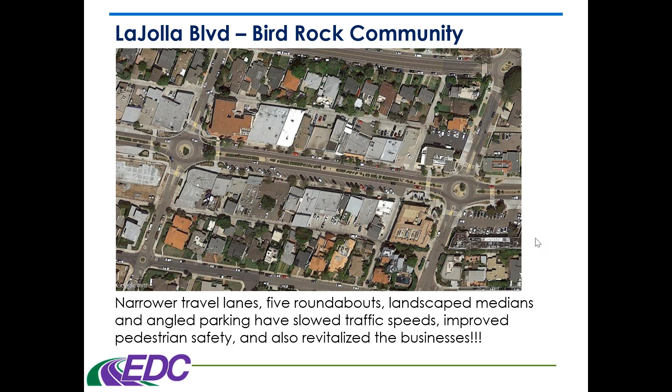That really wrapped up the unsignalized improvements that are part of the STEP initiative. Before we get into the signalized topic, the leading pedestrian interval, let's take a look at this guide.

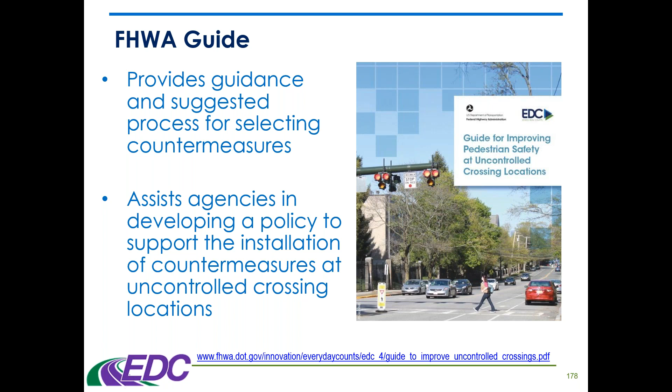One thing I wanted to go over in this book that was important was the countermeasure selection process - it's a 6-step process, and I wanted to quickly highlight these 6 steps. We're going to follow the processes suggested in this guide because it offers countermeasure options based on road conditions, crash causes, and pedestrian safety issues.

So the first step is called collect data and engage the public. The bullet points that fall under step 1 are: collecting pedestrian crash and safety data, evaluating pedestrian accommodation policies that your agency has, initiating a pedestrian safety action plan, reviewing pedestrian and traffic safety plans, and conducting a walkability audit.

You're going to need to do a careful review of your agency's existing plans and policies to help prepare for more in-depth data analysis and public involvement. I want to say there is another guide I want everyone to be aware of - it's from FHWA, released in 2017, called How to Develop a Pedestrian and Bicycle Safety Action Plan.

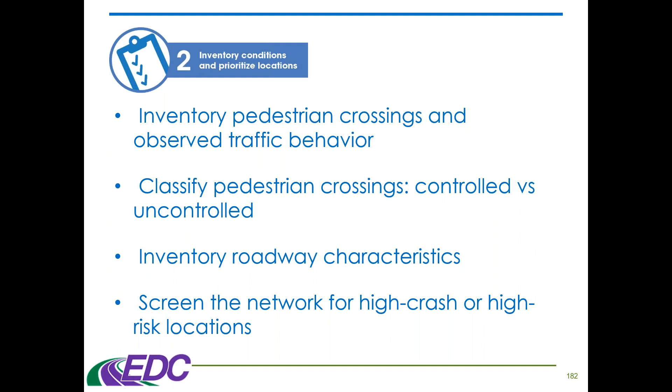We have some things at ODOT that are helpful for those last two. We have our TIMS software that helps to inventory roadway characteristics, and we also have our GCAT. I think Caitlin today might talk a little bit about GCAT.

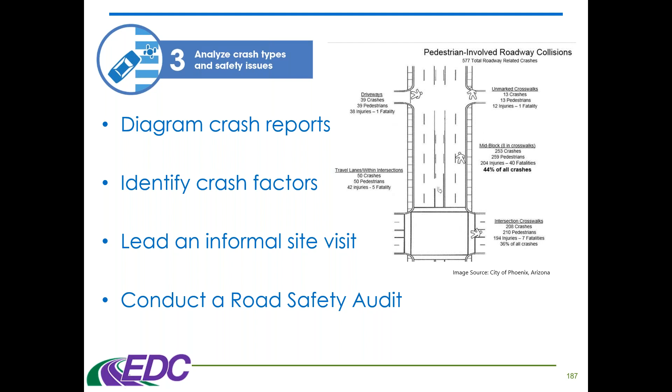Much like in my FoRRRwD webinar starting on Thursday, we take a look at identifying similar roadway characteristics, like curves on two-lane rural roads, and have special treatment for those curves. It's the same with the STEP program. You can deploy crosswalk safety treatments across your entire agency, especially if they're low-cost treatments, and get a lot of bang for your buck with the systemic approach instead of only attacking the hot spots the data shows.

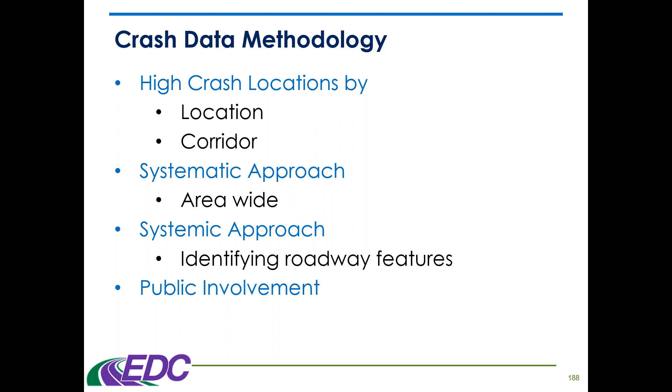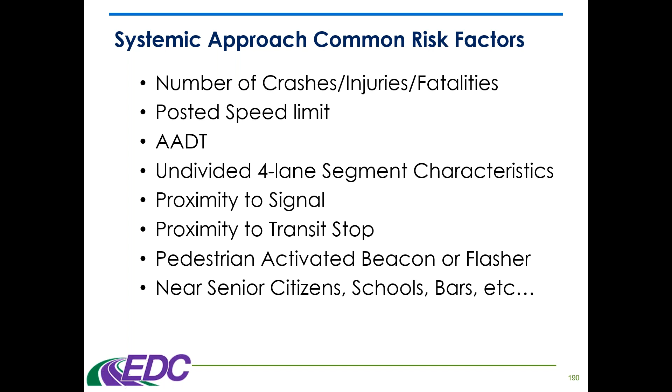In the MUTCD, there are 9 different parts, but Part 2 is all about signs, which includes warning signs for pedestrian crossings. Part 3 is all about pavement markings, including crosswalk pavement markings. And Part 4 is all about traffic signals, including of course the pedestrian crossing aspect of traffic signals.

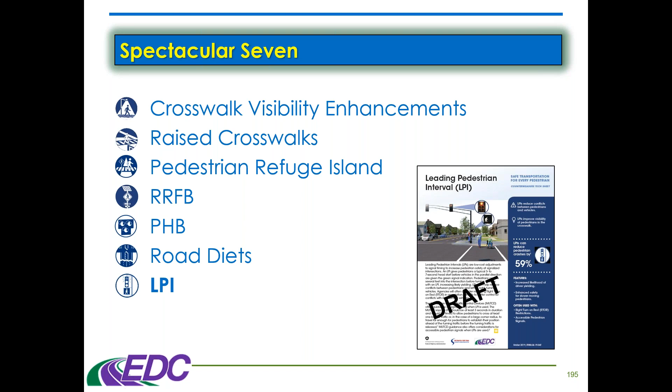As you can see in this slide, you need a 3-second minimum advanced start for the pedestrian to begin walking across the crosswalk. That's the minimum; you can have anywhere from 3 to 7 seconds before the vehicles get the green light to go in the same direction.

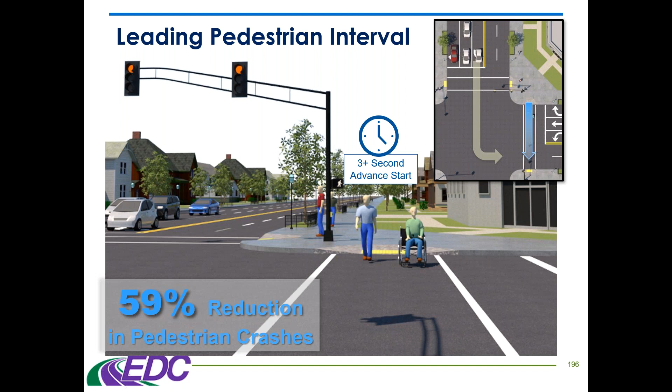This is very helpful for older and disabled pedestrians who are slower to start crossings. Let me turn up the volume so you can hear this video of the LPI in action. The beginning shows what the problem is before installation, then you see how it helps the pedestrian toward the end. This is down in Huntsville, Alabama. It even shows how signal technicians can alter the signal system rather easily if they already have certain types of signals, showing a technician adjusting the timing to install the extra seconds for the leading pedestrian interval. Let's check this out.

In the northeast corner of Alabama lies Huntsville, the Star of Alabama, also called the Rocket City, where the U.S. Space and Rocket Center stands tall as a reminder of courage, progress, and success.

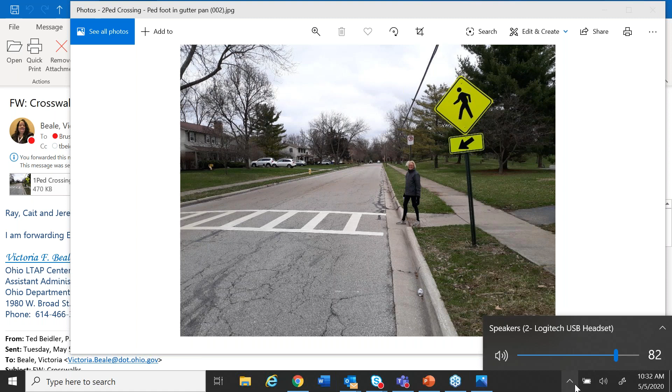All right, so let's go back to this. We were actually hearing it pretty good, Ray. Oh, you were? Yeah, I was anyway. I'm sure, hopefully the others were too. I won't turn it up all the way then. Okay, here we go.

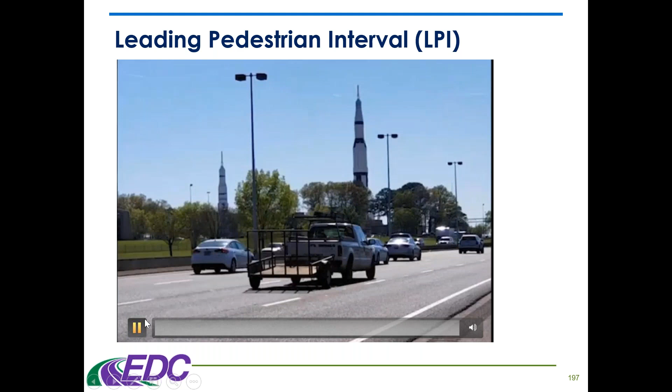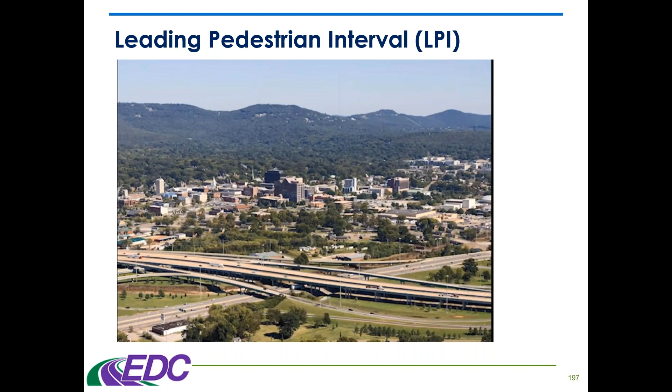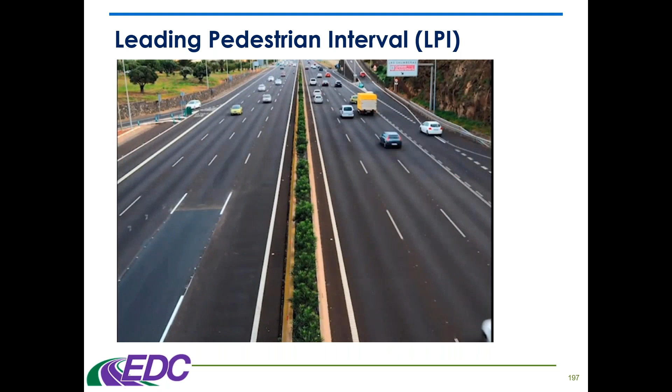In the northeast corner of Alabama lies Huntsville, the Star of Alabama, also called the Rocket City, where the U.S. Space and Rocket Center stands tall as a reminder of courage, progress, and success. In a progressive and expanding city such as Huntsville, the transportation system must be vibrant, safe, and accessible. With Huntsville's dedication to safe travel for all users, it comes as no surprise that the city is focused on improving pedestrian safety. The city uses the leading pedestrian interval, or LPI, to provide an additional level of safety for people walking. The LPI provides an offset or a head start for pedestrians when crossing the street at an intersection before vehicles turn. LPI is low cost, easy to implement, and requires no additional equipment. Better yet, the leading pedestrian interval has been shown to reduce conflicts with pedestrians by as much as 60%.

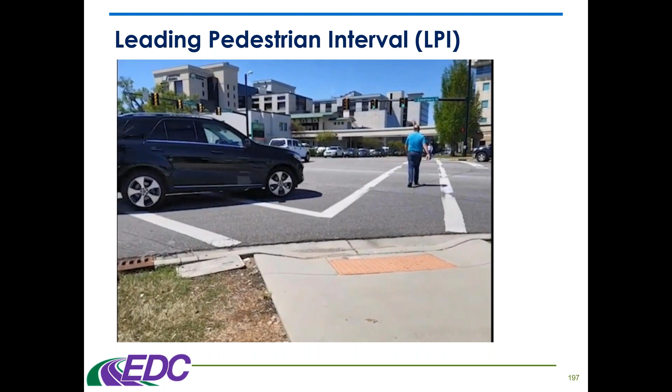At the intersection of Governor's Drive and Madison Street, pedestrians typically have conflicts when starting to cross the roadway at the same time as the vehicle receives a green light. This frequent conflict can be significantly reduced by implementation of the LPI.

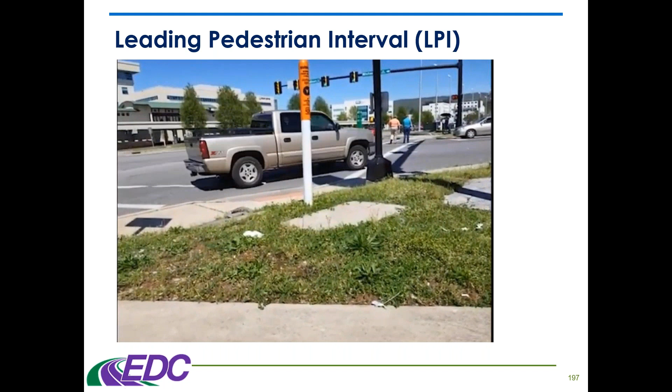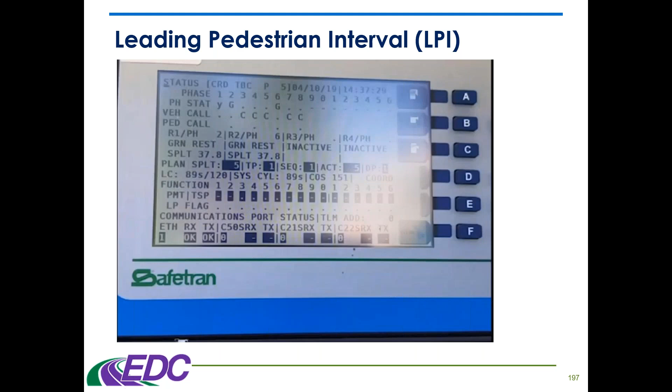The LPI is implemented by changing the settings in the traffic signal controller equipment. Inside the cabinet at Governor's and Madison is a 270 TS2 Type 1 controller. Any TS2 Type 1 or 2 will work. To start, select Controller, then select Timing Plan.

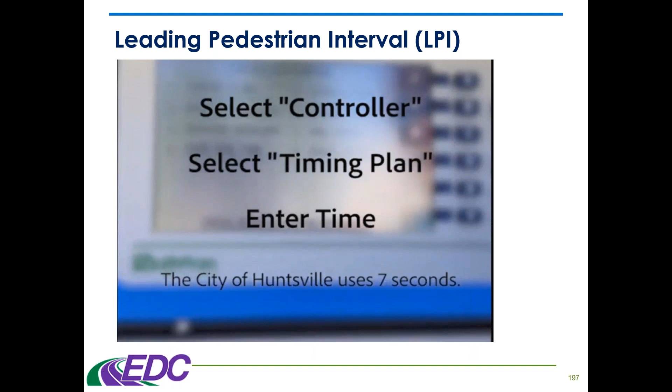The manufacturer's name for the LPI in this controller is Delay Green. Select the time in seconds for each phase where you will employ the LPI. The city of Huntsville uses 7 seconds. That's it, and you're done.

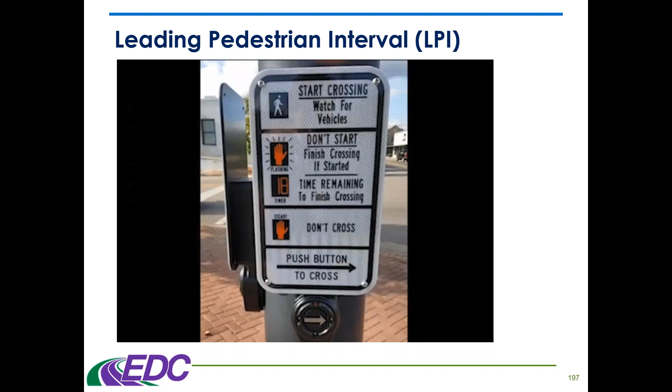Pedestrians should always activate the pedestrian push button. Now that the LPI is active, the walk signal appears 7 seconds before the vehicles get a green light. This puts the pedestrian safely in the crosswalk and in the view of the waiting motorists.

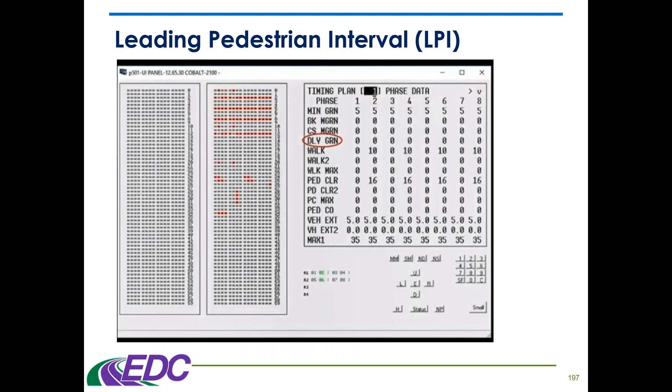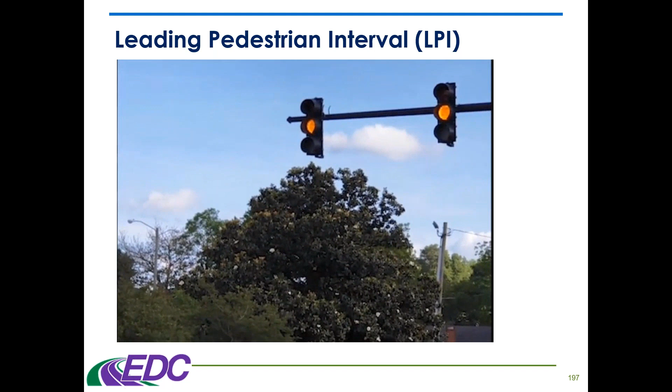Negative impacts to vehicle delay can easily be mitigated with activating controller coordination, phase data, or pedestrian settings. A lagging interval will provide an extended green time for motorists and clear the pedestrian crosswalk. Left-turning motorists are focused on the signal head and oncoming traffic and not on pedestrians in the crosswalk. A no right turn on red may also be used for added protection.

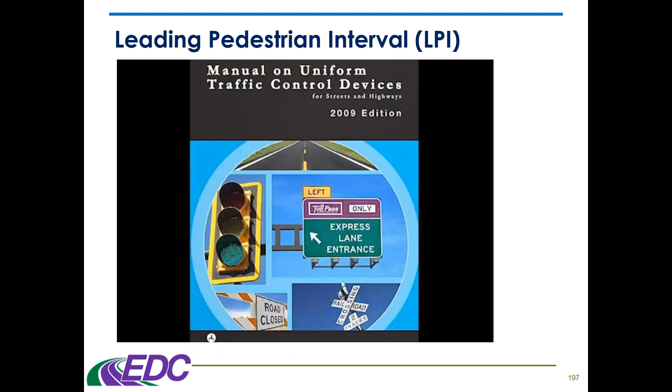The Manual on Uniform Traffic Control Devices addresses the LPI in section 4E06. The city of Huntsville has nearly 350 signalized intersections, of which 12 have the LPI. Based on results thus far, they plan to do more at select locations.

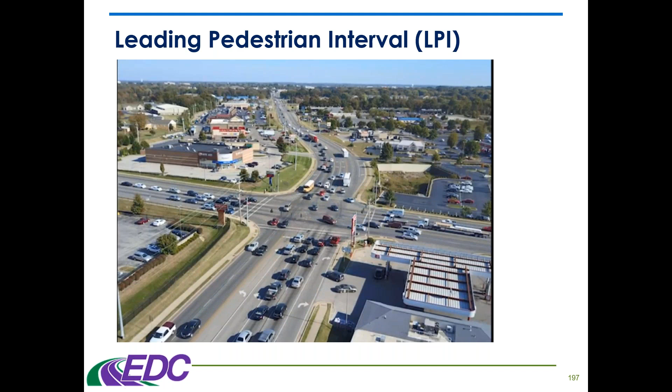No surprise that the Star of Alabama's choice of using the LPI demonstrates that the City of Huntsville is committed to pedestrian safety. If you'd like further information on the LPI and its implementation or pedestrian safety, contact the FHWA Office of Safety or visit their website at safety.fhwa.dot.gov.

So Ray, I have an additional comment for you from Canton. It says: okay, multiple funding sources and project types. Some have been part of larger federal aid projects. Others have been part of local resurfacing projects. We have an overarching complete streets strategy that we implement where possible.

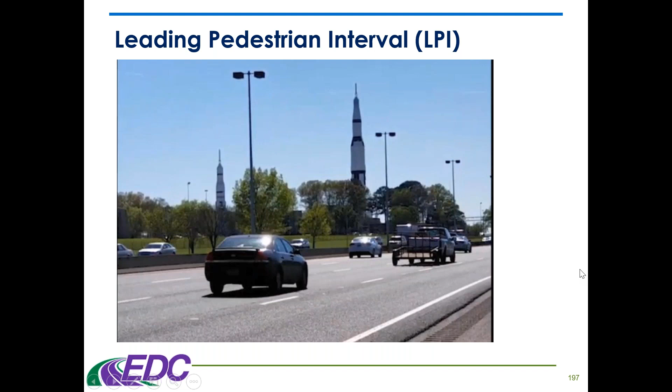All right. Very good, City of Canton. We give them an A for the day, don't we, Victoria? Absolutely. Okay, so

They gave you some sources so you can find more information on the leading pedestrian interval, but one was where to find it in the MUTCD, in section 4. Remember, part 4 is all about traffic signals.

4E.06, paragraph 19 to 23. It says if a leading pedestrian interval is used, it should be at least 3 seconds in duration and should be timed to allow pedestrians to cross at least one lane of traffic, or in the case of a large corner radius, to travel far enough for pedestrians to establish their position ahead of the turning traffic before the turning traffic is released.

I think the video did a good job of showing the problem there, where you had the car and the pedestrians starting out at the same time, and then the pedestrian jumped a little bit, and then the car had to put on the brakes. So this hopefully eliminates that problem.

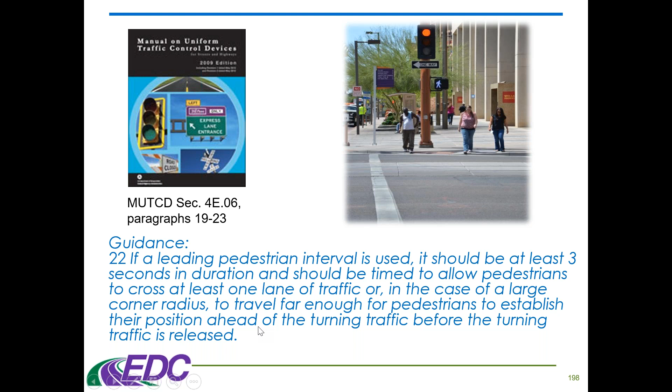And then they also showed you a specific kind of signal controller in the video. So there are some implementation considerations depending on the hardware you have and things like that.

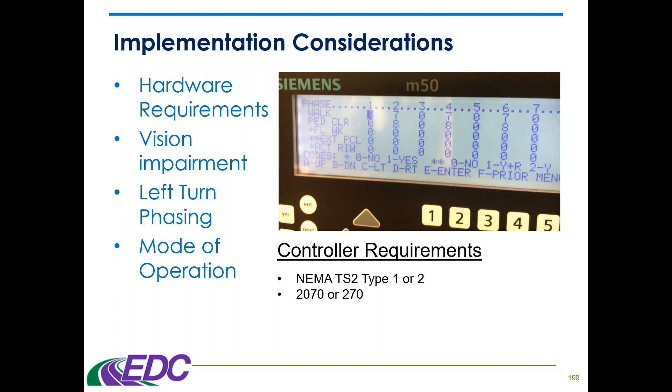They sure as heck made it look easy in the video, though, didn't they? I guess it would be if you have that specific type of controller. Where I live in the city of Circleville, I don't think they have that. They still have the pre-timed signals here.

So, okay, vision impairment and APS. APS stands for accessible pedestrian signals. So without APS, pedestrians with vision impairments cross by listening to vehicle movement, and APS is important when either LPI or exclusive PED phase is used.

So I guess I don't have to remind the participants about the main ADA principle, that we cannot discriminate against the disabled. So it's very important to take our visually impaired people under consideration for this, maybe add this treatment if at all possible. Makes it easier for them as well.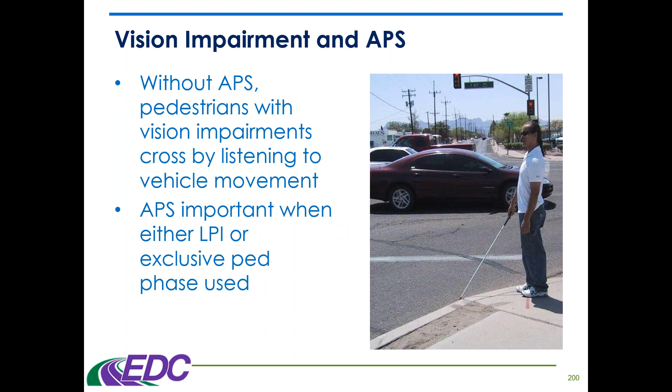Okay, so mode of operation. The timing plans for the LPI can be established in different ways. One is free operations, where it can be actuated by the push button, so it's just added to the overall cycle, which fluctuates per demand. Or we can do fixed time for all cycles, either 24 hours a day or the peak hours of pedestrian crossing, or TOD, which is time of day.

So TOD or coordination must be accounted for since vehicular time on coordinated phase, like Main Street, will be shortened.

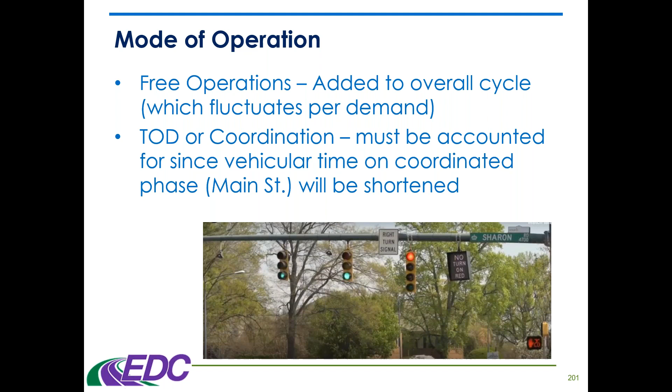Okay, do we have any other input or questions? We have a question about LPIs - do you know if LPIs can be implemented only at certain times of day?

Well, I think what that last slide was talking about is that you have different options to implement it - either by push button only, which is what the free operations is, or to make it part of the timing program itself, either constantly 24 hours a day or only for peak hours of pedestrian crossings or time of day. So I guess those kind of go hand in hand, TOD or coordination.

Okay Ray, we're getting awful close to time to turn it over to Caitlin and Jeremy.

So, would you like to hear a song that the engineer from the state of Maine wrote for this class? I know that is an incredibly delightful song, but I think we're going to defer to letting Caitlin and Jeremy talk. And then if we have time at the end, we'll come back to the song.

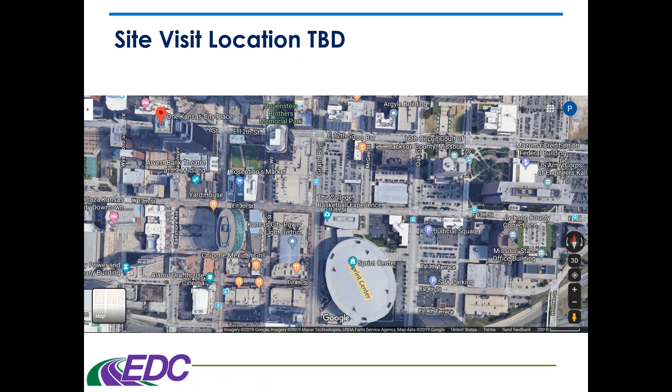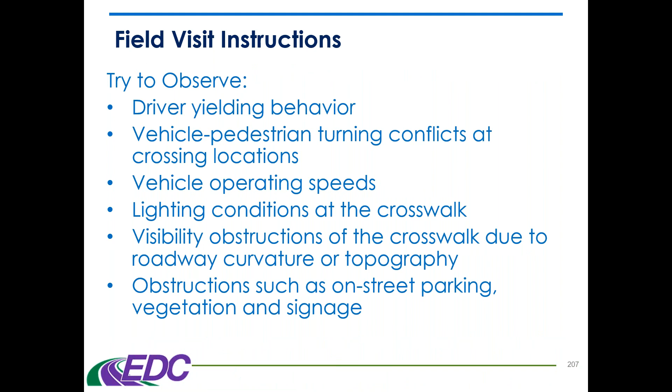If you came to ODOT to take this class in person, this is where we would go out and do a field visit and do our own little study. But I guess we can't do that.

Some other things included in the handout are more resources for you to look at from Every Day Counts 4, which covers uncontrolled locations, and then 5 where we added the LPI, plus the FHWA pedestrian safety website and the Ped Bike info website.

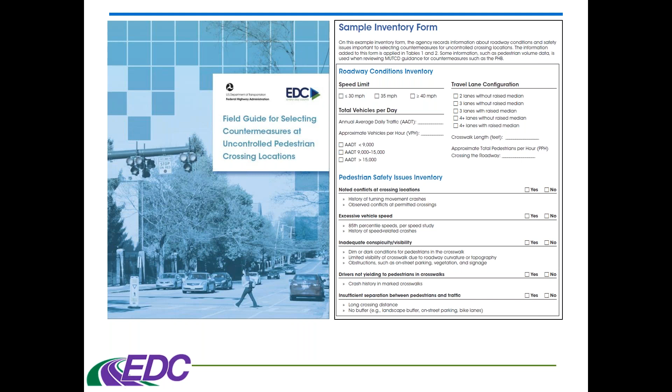Here's the field guide for selecting countermeasures at uncontrolled pedestrian crossing locations with a sample inventory form. And then we have the NCHRP Synthesis 498, which is the application of pedestrian crossing treatments for streets and highways.

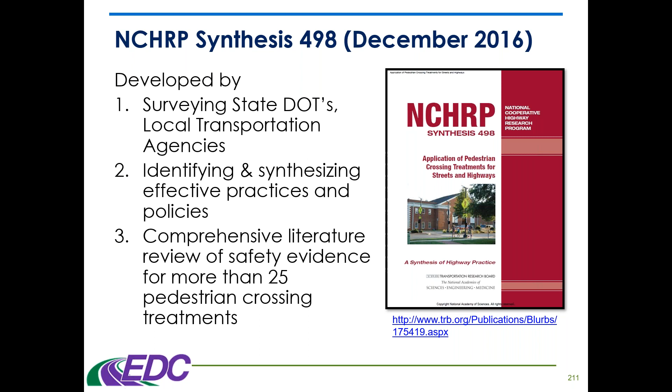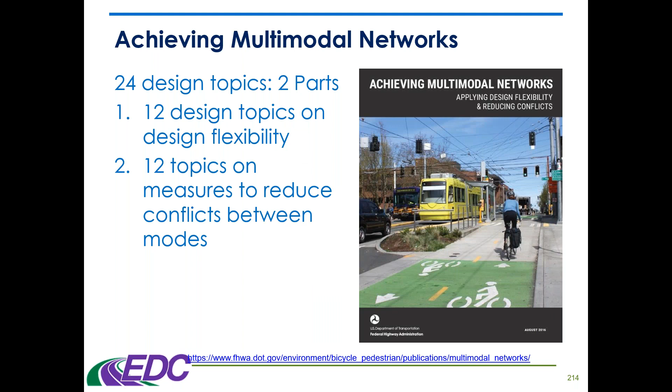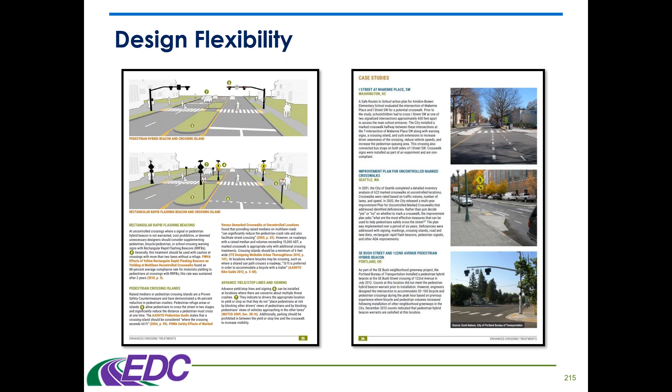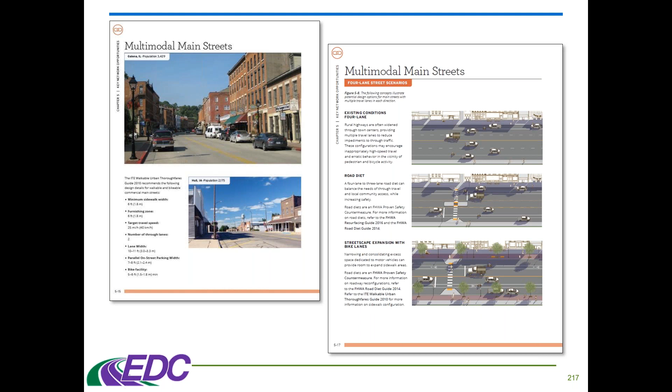Then there's some more case studies showing design flexibility, because not every crosswalk is the same. We've got small towns and rural networks - we have lots of these in Ohio that this guidebook would be very helpful for, like Main Street of a small town or small city. It almost looks like Athens, Ohio right there.

Everyday Counts Part 5 also has information on project bundling, a strategic program delivery solution that saves money. You can find information on project bundling here. Since this was a systemic approach, if you're going to have several of these crosswalk improvements all under one project, you're going to save money - that's the point of project bundling, and you can read more on the Everyday Counts page for that.

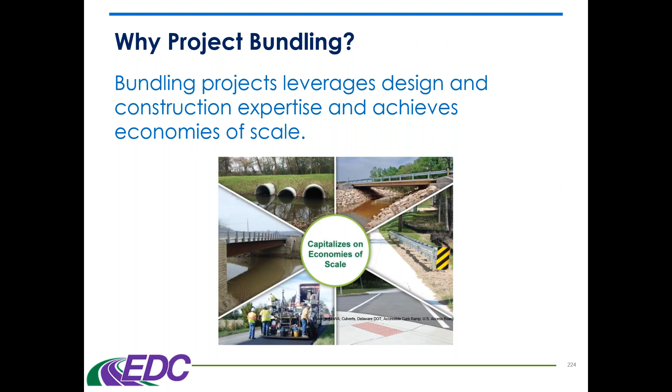It says that bundling projects leverages design and construction expertise and achieves economies of scale. So it works in bridge projects, but also for crosswalk treatments. They also give you some examples from Indiana and Minnesota in here.

And then they get into value capture - capitalizing on the value created by transportation. So things like tax increment financing, developer contributions, if there's a private project that has its own roadway improvements, you can tie these in with them.

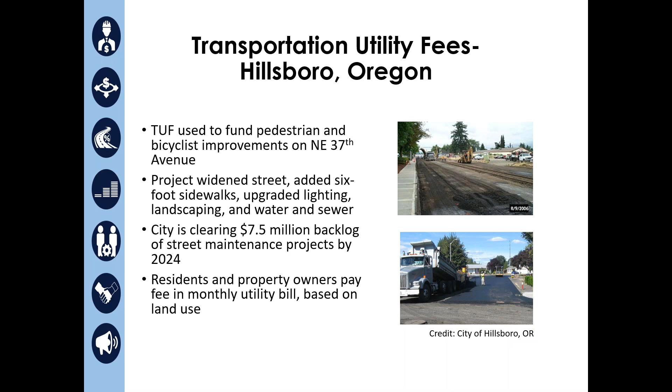Sales tax districts, et cetera, different ideas on how they can be used. So that's all I have on my side, Victoria.

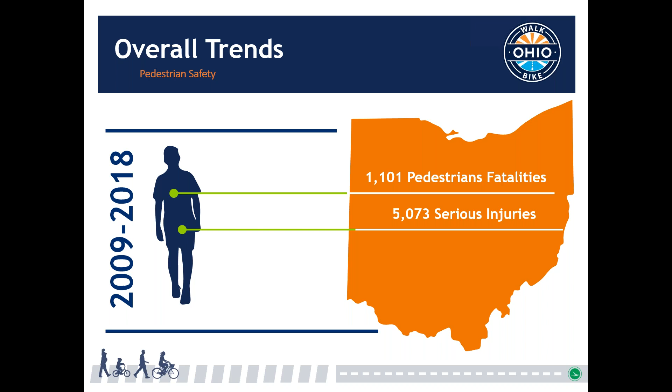So I wanted to start off and share some of the takeaways that we have related to pedestrian safety in Ohio. Through the development of our statewide bicycle and pedestrian plan, Walk Bike Ohio, which is currently being drafted this year, we've really done an in-depth analysis of both pedestrian and bicycle safety across the state. Just wanted to hit a couple of the highlights to share with you guys. In the 10 years between 2009 and 2018, over 1,100 pedestrians were killed while navigating Ohio's roadways, and over 5,000 were seriously injured. So these are high numbers of people being killed or injured.

And when we look to understand where these fatal crashes are occurring, we actually see that about 10 counties account for 63% of our severe pedestrian crashes, or fatal and serious injury crashes. So we're definitely seeing this really being clustered in a lot of our larger cities and metro areas.

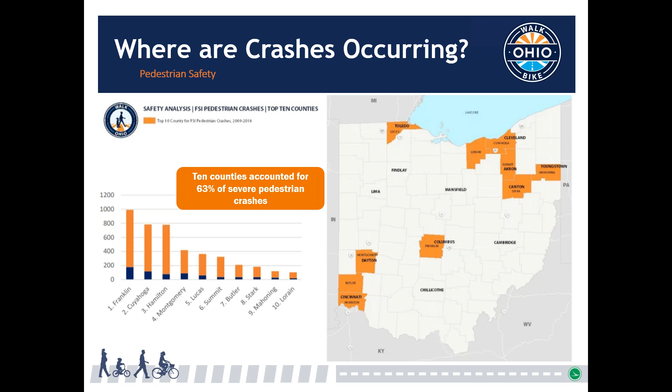When we look to understand some of the trends related to the actual roadway types where these are happening, we're seeing a very standout statistic, which is that a majority, about 55% of fatal and serious injury pedestrian crashes are occurring on arterial roadways in Ohio. And arterial roadways only make up about 8% of our roadway network, so there's this hugely disproportionate impact for pedestrian safety on arterial roadways in Ohio.

Jeremy's going to talk a little bit more about how through our programming, we've really been targeting arterial roadways for pedestrian improvements. Some of the other key insights that were documented in our pedestrian safety memo is also understanding...

That 33% of our fatal and serious pedestrian crashes are actually occurring in some of our highest need block groups in the state, areas where there might be more reliance on non-motorized modes of travel. And actually, these communities only make up about 16% of Ohio's population. So again, a disproportionate impact on these communities of need.

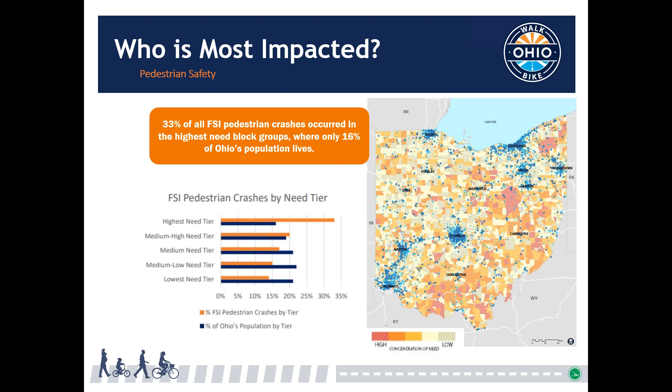You can just sort of see a little bit of the overlap between areas where there is higher need for walking and biking and areas where we see clusters of severe crashes for pedestrians.

Another item to talk about is kind of how these crashes are happening. So understanding what are our most common crash types, what are these typologies that we're seeing, so that we can make sure that we are addressing these types of issues with our countermeasures and roadway design.

The top two typologies really make up almost 50% of our fatal pedestrian crashes in the state, and that is mid-block crossing. So when a pedestrian is struck and killed while crossing outside of an intersection, and then walking along the roadway.

So when a pedestrian is walking along the roadway or in the roadway, usually because there is no facility for them, and they're struck and killed.

In that location. And then some of the other ones are through vehicle at intersection. So this is when a vehicle fails to yield to a pedestrian at an intersection.

The fourth one is secondary crash or disabled vehicle. So this describes an instance where somebody might be getting out of their vehicle on a roadway and is struck and killed in that situation.

And then finally, turning vehicle at intersection. This typology describes a vehicle that has not yielded to a pedestrian crossing as they are turning at an intersection. So the difference is they're not going straight through like number 3, they're actually making a left or a right turn. Jeremy's going to talk a little bit more in depth and share some visuals that make understanding these typologies really, really clear, and they're really helpful.

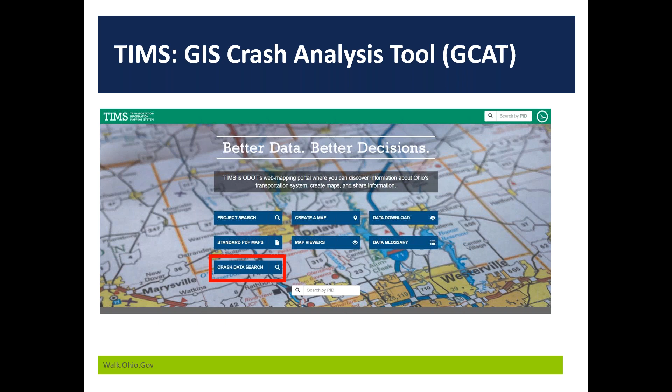So you can click on crash data search. It will help you to understand how to get a login if you need to do that. But at the end of the day, you're able to look for crashes across the state by typing in the years you're interested in, the crash types that you're interested in.

So in this example, I've highlighted pedestrians and pedalcycles. So that's people walking and biking.

You can also look to understand things by crash severity. So if you want to look specifically at fatal and serious injury crashes, or if you want to understand all crashes of all different types, you're able to do that.

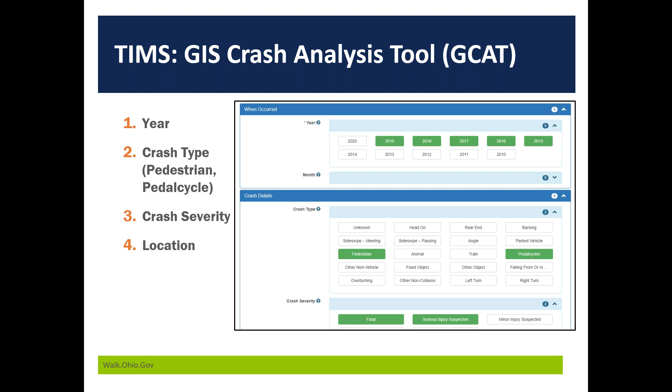And then it's not on the screen, but you'll also be selecting a location. So you're able to run different maps like this. You can select crashes, you can review crash reports, and really importantly, you can export this data and use it for your own mapping or analysis.

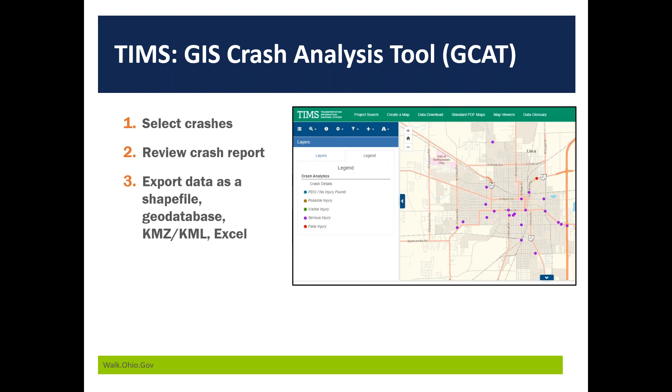You also have the ability to input that data into our Crash Analysis Map tool, which is our CAM tool, also included in the training, and is a way to help visualize a lot of this data. This helps you run different queries and analyze the data in a lot of ways. This is just a quick snapshot of some of the spreadsheets involved with our CAM tool and the tools available to help you analyze pedestrian crash data.

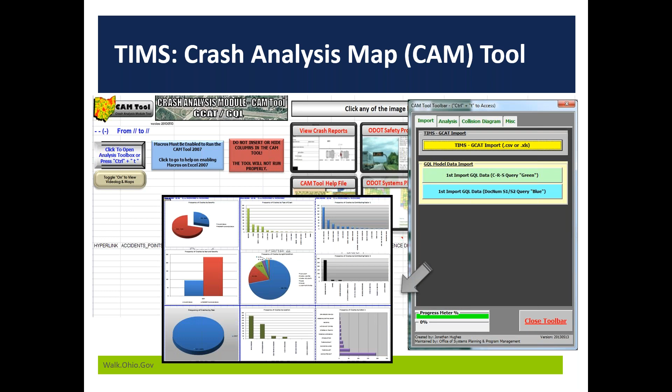The other tool I wanted to mention, also located on TIMS, is the ability to look at different map viewers. We are populating an active transportation map viewer with as much data as we have available. It's an easier way to quickly look at bicycle and pedestrian related data at the state level, and one of those data layers is safety. You can quickly turn on and off three years worth of pedestrian and bicycle crash data, which helps paint a picture of the state of safety in your community.

In this image, I've zoomed in to Holmes County. I've turned on a layer for our state and US bike route system, which is also included in the data set. I've also turned on the bicycle crashes, so it's 2016, '17, and '18 - three years worth of all types of bicycle crashes.

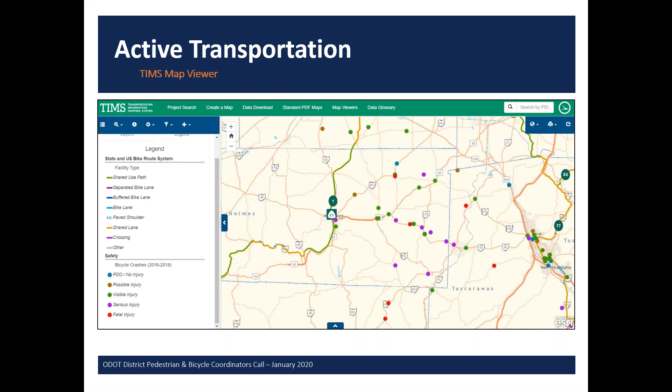I like to often highlight some of the largest funding programs for standalone bicycle and pedestrian projects in Ohio. I'm not going to talk about all of them today, but I am going to focus on discussing funding through our Highway Safety Improvement Program, which is funded at about $158 million annually. It provides funding for safety treatments or corrective activities to alleviate a safety problem or a potentially hazardous situation. It's really one of our largest programs, but not the only type that can provide funding for bicycle and pedestrian related projects.

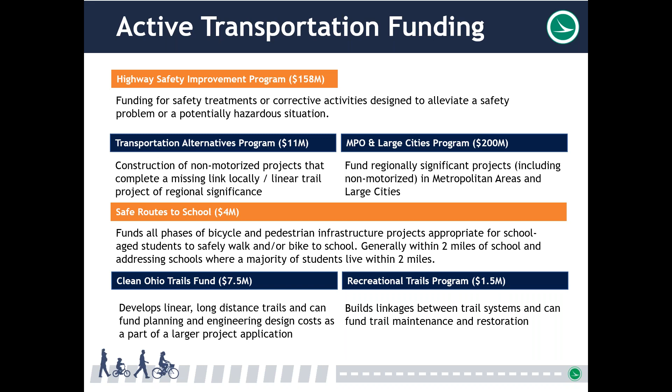So I just provided a couple of the other ones. Something to note is that this year ODOT announced that safety funding can be offered up to 100%, not requiring a local match from local communities, which we know can be very helpful with applications and project implementation.

So there are really two ways for applying for funds through our safety program: the abbreviated safety application and the full safety application.

The abbreviated safety applications can be submitted and are considered really on a rolling basis, so it's an accessible way that you can apply for project funding at any time during the year.

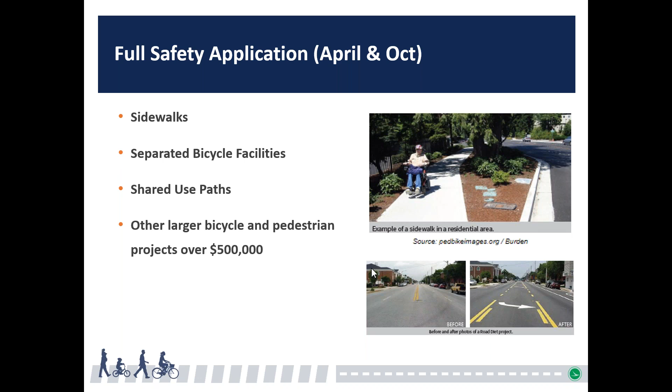For some communities, you might have volume data to include, whether through local counts or accessing activity metrics from things like StreetLight, as well as projects in alignment with our state and US bike route system. That's more bicycle related, but that project is really at its core to improve safety for people biking, so providing better facilities along that route is absolutely appropriate for our safety program.

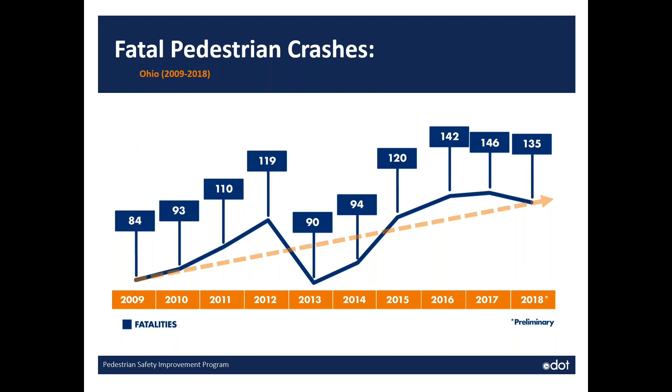The program need: fatal pedestrian crashes in Ohio have gone up over the last 10 years. Between 2009 and 2018, we saw a 60% increase in fatal crashes and a 15% increase in serious injuries. In 2019, Ohio had 129 fatal crashes, and that number is suspected to change as we clean out the crash data.

In terms of where these pedestrian fatalities have continued to occur across the state, 10 counties have made up 63% of all pedestrian fatalities. These same 10 counties also make up 53% of Ohio's population, so we're really seeing these serious crashes happen in our urban areas of the state.

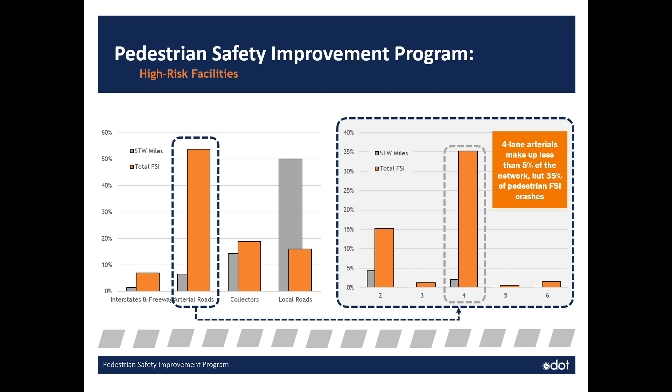As Kate mentioned earlier, pedestrian fatal and serious injury crashes are highly overrepresented on arterial roadways, with 4-lane arterials being the most overrepresented facility type. The graphic shows the number of lanes in the arterial metric. With the Pedestrian Safety Improvement Program, we wanted to target arterial roads as well as collectors, to give the selection process a little wider view.

We also see walking along the roadway as one of the primary fatal crash types along arterials. These are usually happening in the dark, which is why we include lighting as one of our countermeasures within the Pedestrian Safety Improvement Program, as you'll see later. Lack of sidewalks is also a huge issue for this crash type.

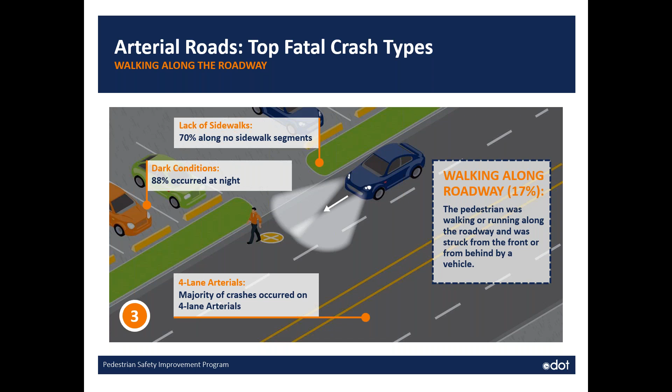We also see intersection crashes happening a lot. Again, in urban areas, usually we won't find crosswalks marked at these locations where these serious crashes are occurring. And typically it won't be signalized, because at many of our modern signals, we see pedestrian signal heads and marked crossings.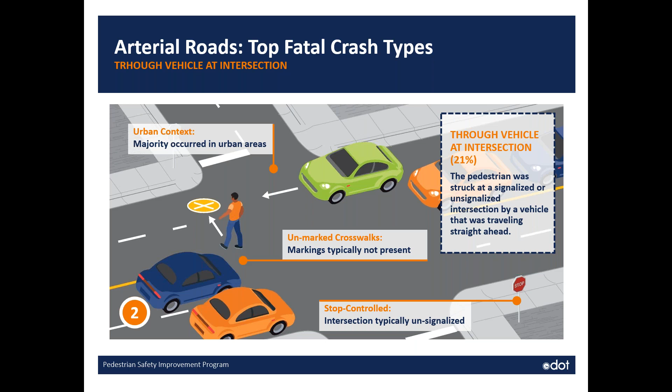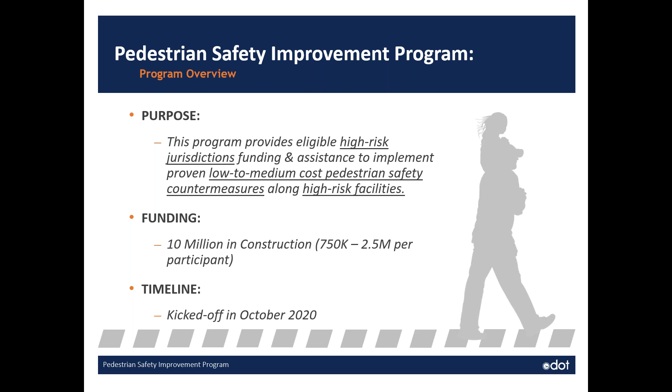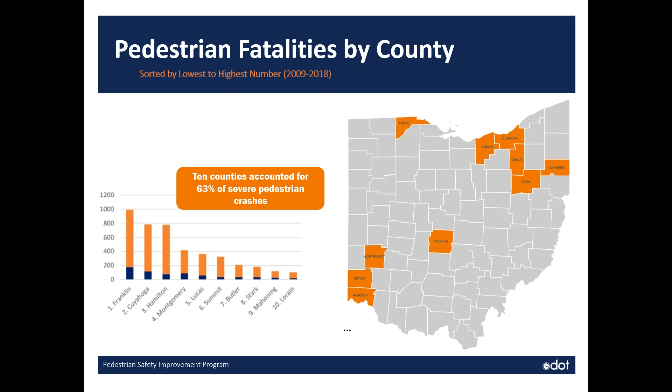You've seen this slide a couple times already, but the solicitation process started by looking at where these fatal crashes were occurring. So in our most urban areas of the state, all 8 cities that are part of this program belong to the counties depicted in this graphic.

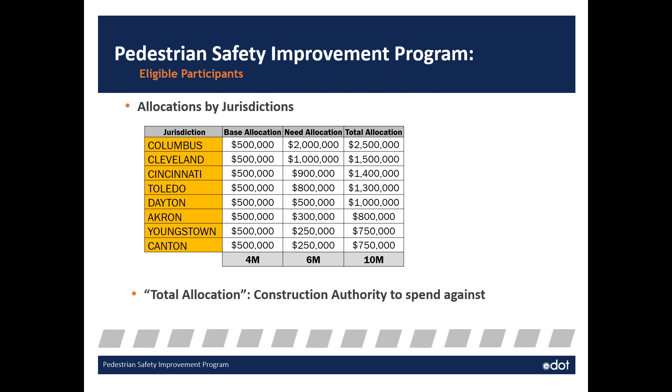For how we allocated the $10 million, we started with a base allocation of $500,000 each, just as a start, and then the rest was allocated based on need, which we proportioned out using the fatal and serious injury pedestrian crashes over the last 10 years.

As I mentioned, we finished the planning process just recently, so now we're into preliminary and environmental engineering, which we have task order design to accomplish. We expect this to go through the summer and have final tracings to us in October, November.

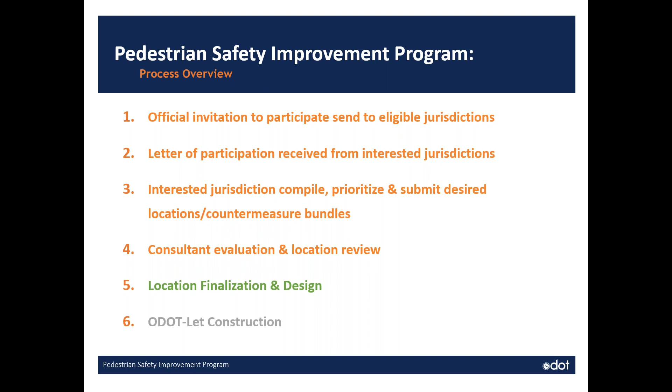The location process itself was primarily done by the cities. We gave them some guidance up front, such as selecting locations on arterials or collectors, and provided them with a list of eligible countermeasures for this program. Another caveat, in order to keep the timeline strict, was that locations selected had to avoid any permanent right-of-way takes or major utility or drainage impacts.

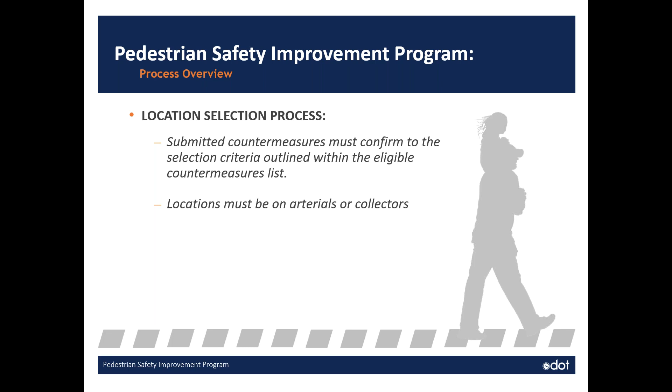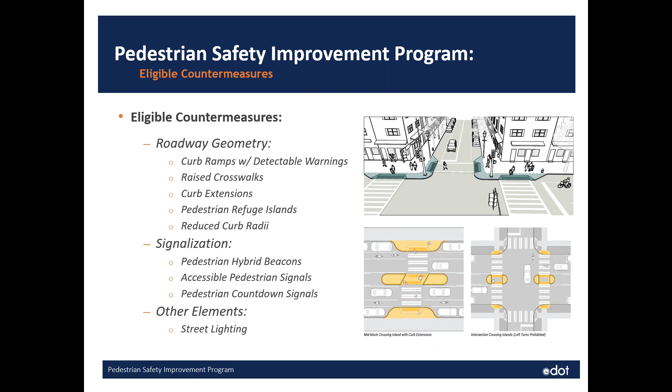The eligible countermeasures are listed here. They range anywhere from fairly simple improvements like marked crosswalks or signage, to some more major improvements that are more infrastructure intensive, like curb extensions or pedestrian hybrid beacons. Here's that list continued.

While this program did not fully encompass STEP's Spectacular 7, as Ray's mentioned a few times, with the omission of LPIs and road diets, as an agency ODOT still really does encourage them. They just didn't fit into this program as much.

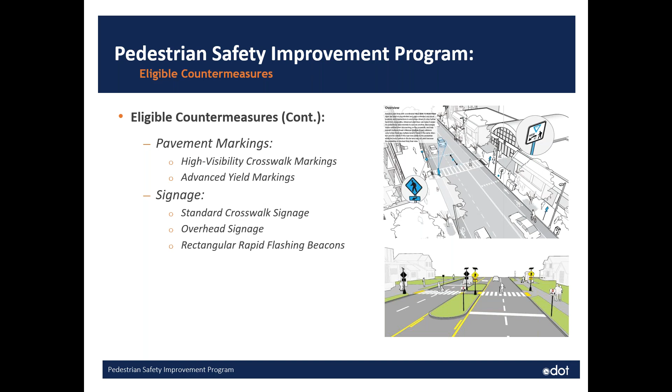We are currently in the infancy of the design stage, with some surveying and preliminary environmental work commencing as of last week. Right now, 455 locations have been selected across those 8 cities as part of this program, with over 2,000 individual treatments happening across those locations.

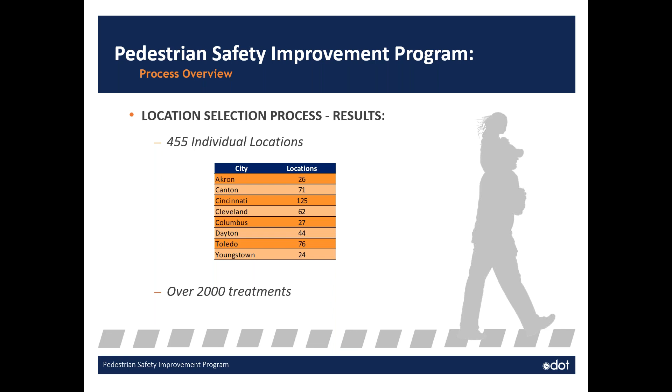Appreciate your time, and if there's any time left, Kate and I are happy to field any specific questions to the highway safety program and active transportation needs.